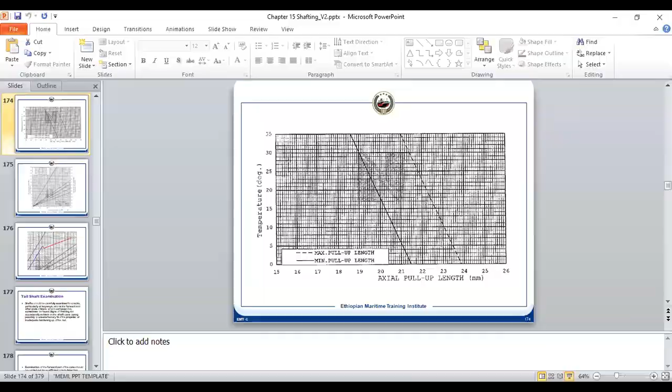So in this case, all the manufacturers will provide you a curve. It is ship specific, and this curve will give at what temperature what will be the actual pull-up length. It means how much you will be pushing. So in that case, if you see, there will be a minimum and maximum value.

For an example, this is 25 degrees centigrade if it is the boss temperature and the shaft temperature, and this is the minimum and this is the maximum pull. It means in between some distance you'll have to push. On the horizontal axis, it is given at 25, it will be from here. For an example, it is 19.5 to this. So within this pull distance you'll have to maintain.

So you must check what is written, and the temperature is measured by the dry dock people. They do this job. You need to see what is the temperature in the curve, what is the distance to be pushed. And then what we have recorded, the pressure, at what pressure you have pushed it and how much it has moved, has to be plotted.

So there will be another curve. What information does this curve give us? For an example, when your propeller is fitting on the shaft, it will be a combination of dry fitting and wet fitting. Initially it will be dry fitting. It means we'll fit the propeller in dry condition. What does it mean? There will not be any oil injection. After that, we'll be using the oil.

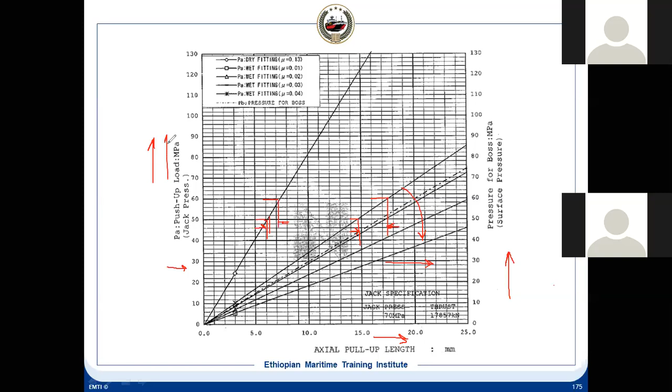In that case, what is the problem? Because we are applying less force, the pressure in this direction will be less and we'll be getting more travel. We know how much it should travel. Anyhow, once I answer that, you'll understand why we do it. That is one reason, but there is another reason, because that can be avoided, isn't it? You can apply the oil and have more travel. Some of you have raised hands. Tell me one by one.

Okay, Chief. Sophonias speaking. Sophonias, tell me. So

If we want to travel 25 millimeters, then we have to apply a higher pressure on the jack. But if we first do it by dry fitting, for example, we can go 5 millimeters at 40 megapascal, and then continue by wet fitting. So the 25 millimeter travel will be achieved by less pressure in the wet fitting. Yeah, it is exactly what Anio told me. You actually told the same thing.

But suppose we don't do the dry fitting. Is there any problem? Have you understood what you are saying? You do the dry fitting, and after that, instead of increasing the pressure, you are moving at reduced pressure. But any other reason? We can do this wet fitting from the beginning, Chief. Anybody else? Yeah, Chief. Melissa, tell me.

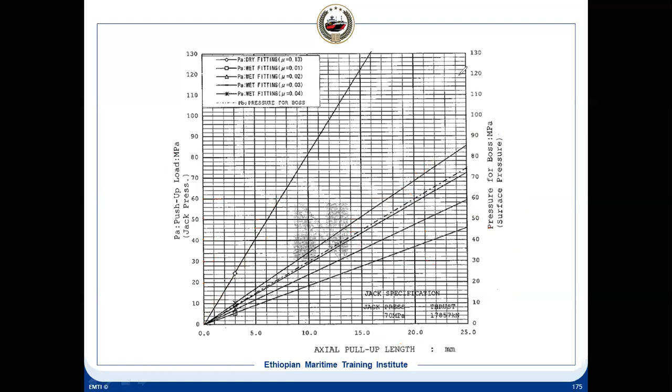You must verify whether it is like this or not. Your manual will say how much the jack-up pressure will be, meaning the pressure for the dry fitting, and then for your wet fitting. But this distance has to be maintained, and there should be a corresponding relation between this distance and your pressure. So you can verify from your manual if it is okay or not.

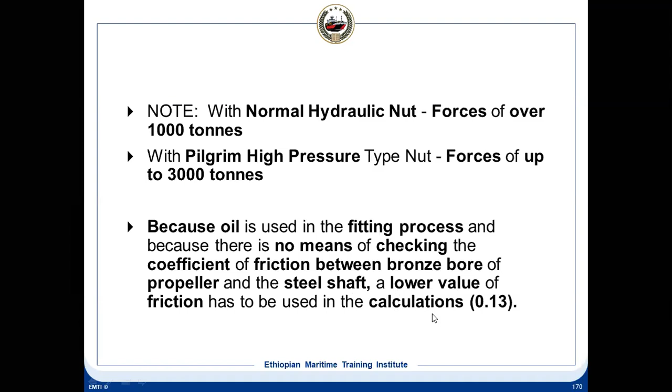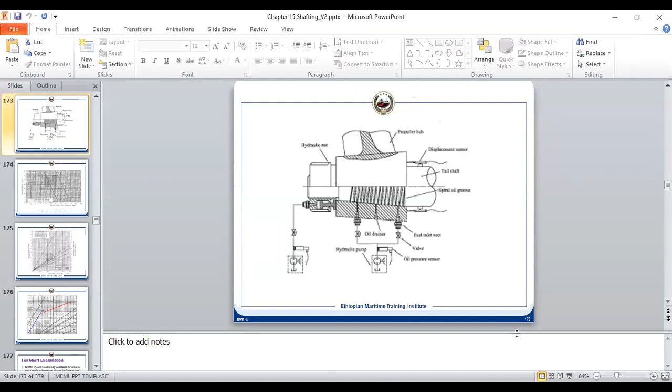And these grooves are spiral grooves, like a thread, so that when you inject here, it will move all over the surfaces. And there will be a drain. You open these two as well as this drain, so that all the oil gets drained out after you have achieved that distance, and you drain the oil between the surfaces to have the frictional grip. So is it clear, everybody? Any question till now?

Yes, Chief. Tell me if you have any question. Yeah, Melissa, tell me. Okay, Chief. On the dry fitting, why do we choose grease instead of oil? Some reason?

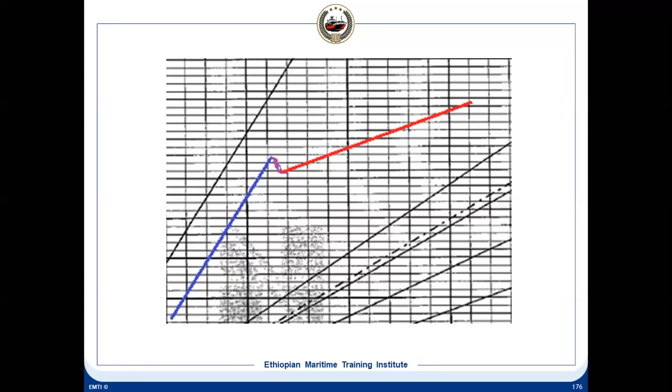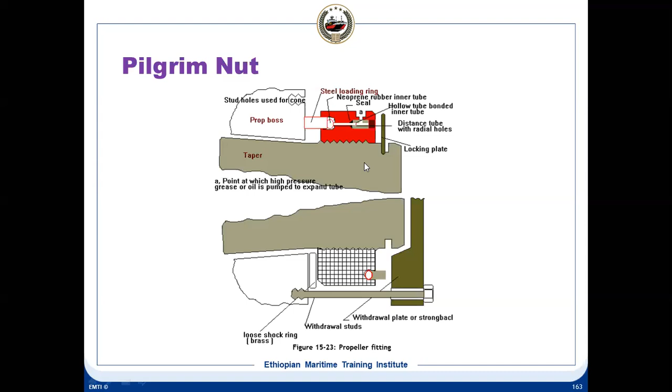Grease we only use for the Pilgrim nut. But in what we are now saying, that is oil. We don't use grease. This is the development: first it was with a key, then the keyless propeller came. At that time we used the Pilgrim nut, and the Pilgrim nut used grease. But now we don't use grease. We use hydraulic oil.

So this is the one: we use the hydraulic ring, and this nut is a hydraulic nut, so we don't use grease. The first development for fitting the keyless propeller was the Pilgrim nut. And this is the hydraulic jack. The concept is the same as the hydraulic jack you use for removing and tightening the nut.

It can be a hydraulic ring here, operated by oil. Even the dry fitting is operated by oil, not by grease. The previous one, the Pilgrim nut, was designed with grease. Understood, Melissa? Okay, thank you. Yeah, they used to use grease. And now, any other question?

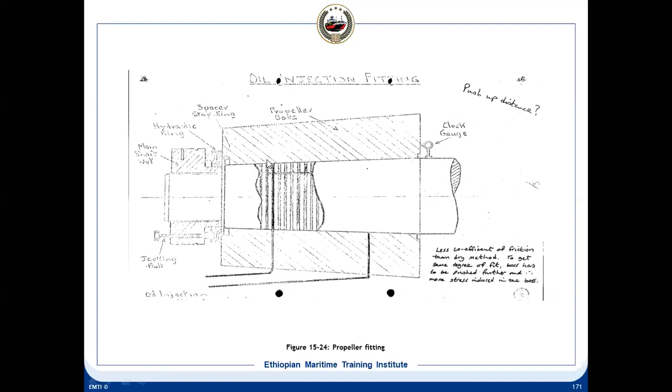And there they used to have dry fitting, and during the dry fitting you need more pressure. Actually, with grease the chance of leakage is less because the viscosity is very high, so you need very high force to fit it. Here hydraulic oil can do that without problem, because you are applying much less force than with the Pilgrim nut. So any other question?